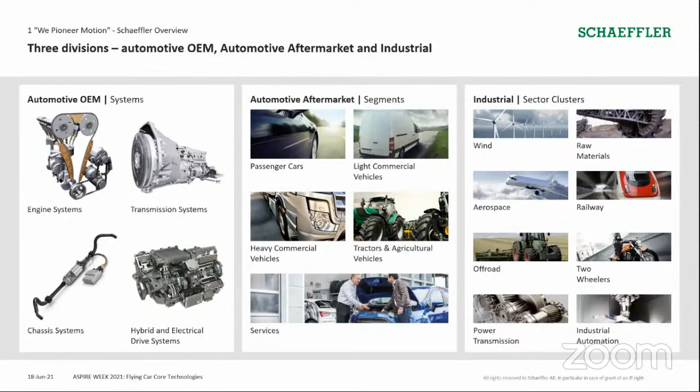What I want to highlight here is really that we have a lot of experience that I'm very proud to say is cross-pollination, where something that has developed many years in, say, automotive can then be moved into wind or off-roads or raw materials and aerospace and vice versa. What we do in aerospace can then be engineered and become a cutting-edge technology in railway or automotive, etc. So this is the strength of what we have as a conglomerate of industrial and automotive company here at Schaeffler.

Okay, a bit more then, because today we're talking about aerospace and I'm from aerospace. I'll talk a bit more about our footprint in aerospace.

Firstly, we are a manufacturer of bearings. The most common bearings that we talk about would be like ball bearings, but there are a lot more bearings than ball bearings. I'll not go into the detail here, but I just want to say that on all these bearings, as you can imagine, anything that needs to turn, needs to rotate, will actually require some form of bearing to reduce friction, to ensure the turning is smooth, etc.

So actually, in all the planes that you take, and the engines that power them in commercial aviation, the technical term is turbofans. And across all, I think, major commercial aviation turbofans, we have some bearings on it that is made by Schaeffler.

Some of it are like all this here they see on the screen here are what I'll call the growth sectors. We are very successful on all the legacy programs, the mature programs like CFM56, PW4000, the Trent programs that if you're familiar with, you know. But these are really what I would say are the planes that have been manufactured in the last, say, 5 to 10 years, and they have another 40 years to go, and we have bearings on them as well.

Okay, so this is something that we are very proud of, and we look forward to continue to really be on these new generation engines because they are clearly more efficient. They do a lot more in terms of greening the environment, and we are very proud to be a part of them.

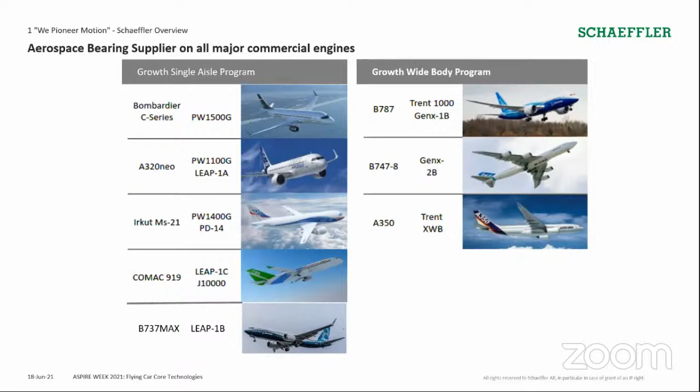And of course, I cover the Asia Pacific region. We also look out for opportunities like OEM opportunities where people want to build new things and require bearings, be it in the UAM space or in the traditional commercial aviation space.

Okay, and now I think it's really the gist of what I hope to share with you after the introduction. Firstly, this is what I call the inevitability of cars growing wings. Cars have been on the road for a long time, so has planes been flying in the sky. But flying cars has always been a dream, and I think we, this generation, yourself, myself, are really at the cusp of seeing it happen. And I hope to provide you some evidence and food for thought to see why this convergence is so real today.

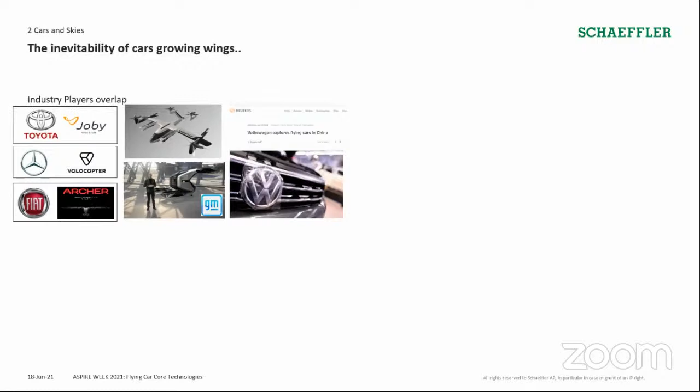And this picture from Reuters, a snapshot from their website news, shows that Volkswagen, as recent as one month ago, talked about wanting to explore flying cars in China. So clearly there's an industrial player overlap where the traditional automotive players are moving into this exciting new space. They want their cars to fly, if you put it colloquially.

Then the other thing I want to highlight is what I call a core technology overlap, where a lot of these core technologies, even if they want their cars to stay on the ground, they need to explore. And these technologies are also, coincidentally or by design, the same set of technologies needed to enable UAM and flying cars. Firstly, electrified propulsion. For anything these days, partly because of the green movement for sure, but also because of factors like noise, you want to fly near airport considerations where you want to land, you need electrified propulsion that's cleaner and quieter. This has been in development in automotive for a long time, and today all the major UAM players are also talking about electrified propulsion. So that's the first technology overlap.

The other one is energy storage. You probably will have heard about lithium, or even solid state batteries, and of course today we keep talking about hydrogen as well. This is also an area of energy storage where, say if you buy a Tesla, or your father or your friend buys a Tesla, the question is, what's the range? In electric vehicles, the number one question is, what's your range? It's like your PSLE score. What's your range? So the range matters, and rightly so, because nobody wants to spend time constantly charging their vehicle or having range anxiety. So energy storage has become a big domain for the automotive player to play in.

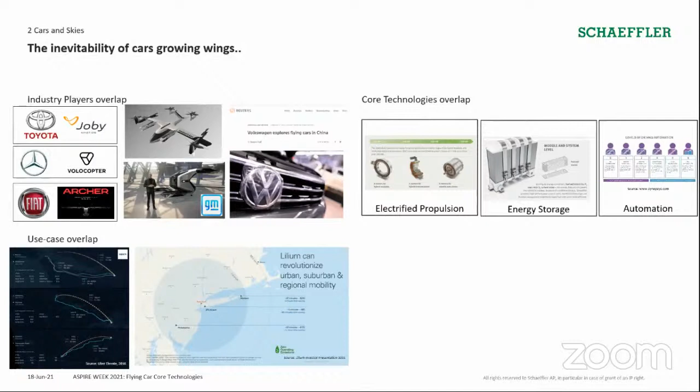And of course, if you are the automotive players of today, instead of being displaced by similar use case UAMs, you then want to join them, right? So that is the inevitability of car growing wings.

The final point would be a bit more philosophical, if I may. It's really that there's this socialization overlap. In this socialization, companies are trying to talk to us about their messaging, about who they are as a company. You'll be familiar with this at scale - if I ask you what Apple is about, all of you have a ton of feelings about these brands, right? I think it is not that different in terms of how even a company like Joby or industries like UAM as well as car industries have come to that form of marketing concept.

There's a socialization overlap, and today the socialization is largely about speaking to a generation like yourself about what the company stands for, not just in technology, not just in the service they render, but what they stand for the planet, in a very broad sense.

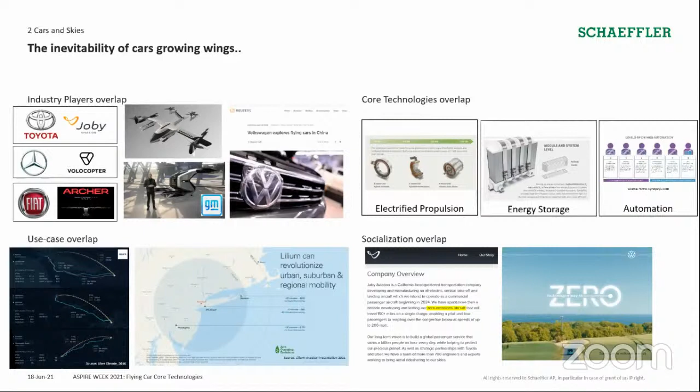So this is really about this socialization overlap, that the car manufacturers, as well as UAM, are not just telling you that I'm going to save you time or let you have a good time, but that if you buy our product or use our services, you become part of this global movement of creating a better world. So there's a socialization overlap that car manufacturers are already on, and UAM is pitching a similar idea. This convergence brings us to the inevitability of cars growing wings, that these two industries have come so close together that they are almost one.

Okay, that's just a flavor about cars and skies. Hopefully that has given you a broad overview about how these industries are coming together. The other thing I'd like to talk about in greater detail is the core technologies we see as important to enable cars flying in the sky.

The first enabler would be electric motors. To enable flying cars, you would need better electric motors - lighter, quieter, more maintainable, and more importantly, certifiable. I'll elaborate a bit more about this concept of certifiability, being able to certify it.

Schaeffler has made many strategic acquisitions because we believe in this electrification movement of the world. We bought a company called Compact Dynamics - they do electric motor design. We bought a company called Elmotec Statomat - they do high volume production of e-motor machinery. This allows us, with our unique appreciation of manufacturing and engineering ability, to mass produce high quality electric motors, which is the picture you see here in the middle.

Our involvement in Formula E, top left corner, shows we actually have a Formula E race team, which is electric. Formula E is the electric version of Formula One. Because of our involvement in this race, it has allowed us to constantly push the limits of e-motor designs, like power to weight ratio, efficiency, things like that, that we have constantly been on.

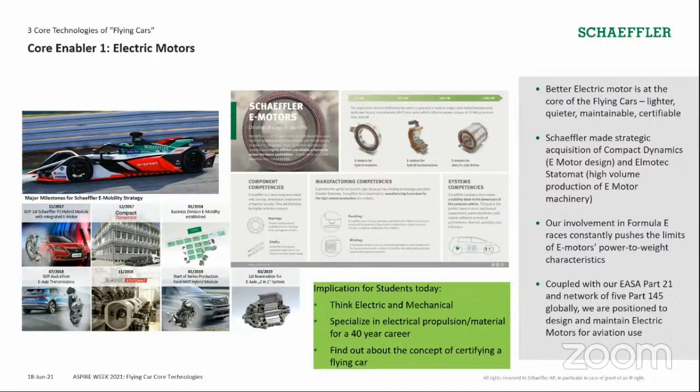But I think this will be interesting for a student to think about, because if you do join this industry, I think this will be a large part of your work - more than pure technological breakthrough, it will be largely about how to harmonize this technological breakthrough back to a certifiable framework in the existing commercial aviation industry. Okay, so this is the first point on electric motor.

Second, a technological enabler that we believe is important in making flying cars truly able to fly is cloud-enabled condition monitoring. There are actually many layers of points here. I'll go through them one by one.

Firstly, in the eVTOL or UAM operation, by design it is short duration, right? If not, you can drive. If it's very large, very far away, you also don't want to take an eVTOL - you'd take something like a train or whatever. It's over a large area. That's the whole use case - fly over something quickly with rapid turnaround.

I think if you read the investment thesis of Lilium, they'll tell you each vehicle, each day, is supposed to generate $15,000, if I'm not mistaken - you can read up on this. So the point is, to make it work, it needs rapid turnaround. You need it to be constantly like a super grab, as you can imagine. The driver has no time to wait - just stop, then go to the next destination, pick up the same passenger, and keep going and going. There's no stoppage time, so you need a rapid turnaround.

To enable this, you need some form of condition monitoring, because you cannot allow downtime. You need an incredibly high uptime for this eVTOL commercial model to work.

Because of the large area, some of the parameters needed in this condition monitoring system are as follows. It has to be cloud-enabled, so that anywhere, anytime, it can be accessed by a set group of people. You need it to be manufacturer agnostic, because there are so many different brands of people building different things today - there's no standard on what kind of condition monitoring tools framework to use. So yes, the solution needs to be manufacturer agnostic.

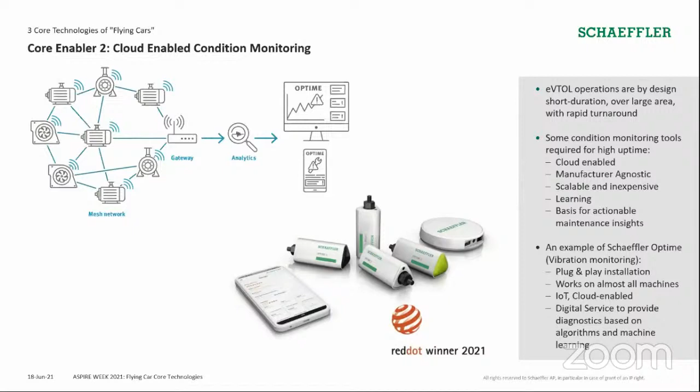But more importantly, it is learning. It takes a vibration pattern, and then we use AI and machine learning to understand what's going on, and provide as a service meaningful insights on what is happening to your machine and what that means in terms of maintenance action. I think for students here, I've talked about this technology, cloud enabled and condition monitoring.

The goal is really that for students today, you need to understand that the world has moved to a point where data is king. It's a cliche to say today, but yes, data is king. You need to collect data, lots of data will be collected.

And to manipulate that data, you as a student today need to be reasonably familiar, at least from a conversational perspective, with the idea of coding. You might not be the one coding, you might be project managing people who code, might not be working in Singapore, but you need to be able to talk their lingo at least.

So I think what's important is that you need to be familiarized with languages like Python or R, or whatever else your school is teaching you. Take those lessons seriously, and truly code. Don't ask somebody else to do it for you. Do it yourself and really get a good grasp of it, because it is important.

And you need to understand big data concepts, different ways of manipulating data, different tools like Hadoop, whatever is out there. You need to somewhat get a grasp of it. You need not be an expert, but you need a working knowledge if you want to go into this field, or if you want to project manage a bigger thing, you need to minimally be at a conversational level able to talk about these things.

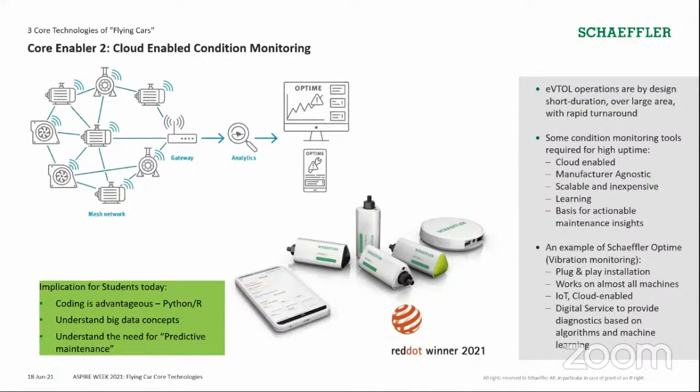And I hope I've given you some implications of what you can do as a student today. The third technological enabler that we foresee is that we need some form of a steer-by-wire concept, some form of actuation system. Electrified AAM or UAM vehicles require some steer-by-wire solutions to actuate control surfaces.

Because if you look at the latest design, even from our friends at Volocopter, they talk about a tilt rotor concept where you vertically take off, but you need to turn the rotor so that you can fly forward, or they have some wings or control surfaces that you need to actuate. So we're talking about something that needs to move in flight, so you need something to actuate it. At the moment, there's no mass market ready product in this class in terms of steer-by-wire or control-by-wire for aerospace.

So what we have here is a paravan. I'm not selling this thing to you, but I just want to let you know that this is what Schaeffler has been doing, and it shapes our thinking quite powerfully as well. We have this Schaeffler Paravan Space Drive. It has more than 1 billion driven kilometers. It was designed for disabled people to drive the car.

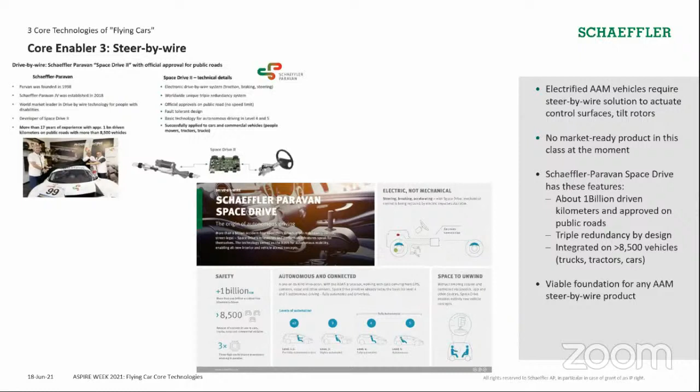So it's a joystick system that you see in the middle of the screen. It has more than 1 billion driven kilometers. It has triple redundancy by design. It is integrated into more than 8,500 vehicles globally. It's a viable foundation for any steer-by-wire concept that we believe is needed in the AAM or UAM industry.

I think what I would share in terms of what it means for you is that, as a student, you need to see that while I've convinced you the world is going electrified, I also want you to see that while it's electrified, we live in a brick and mortar world. You live in a house that's built physically, right?

Because of this reality that we cannot avoid, no matter what happens, we need something mechanical to deal with the physical environment as well. Anyway, let me go back to my first point first.

Electrification, or what I want to type there is electrified actuation, is actually an enabler of autonomous driving. Because like I alluded to autonomous driving just now, it's generally accepted that for anything to be autonomous, you want a computer to guide it, you need an electrical system so that the computer can control an electric motor. A computer can't control an ICE, a combustion engine, as well as an electric motor in general.

It's not that it's impossible, but it's a lot more work. Because if it's electric, you just control the voltage and it goes. But if it's ICE, you have to control a lot more things, how the fuel goes in, blah blah blah.

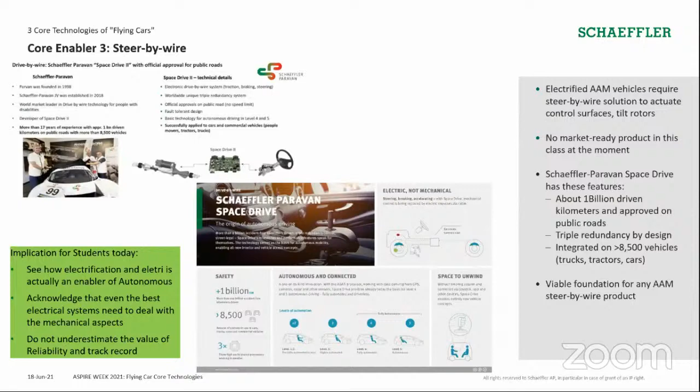Of course, you want the government to have a robust framework around it. So how do they do that? They have to base it on the value of reliability and track record of the product, and all the designs in place to ensure redundancy, etc. So I think this is important, and these are the 3 points I hope to leave with you, thinking about this.

And then finally, the second last point is that we talk about energy storage, and specifically I want to talk about hydrogen, because I think we are part of a growing eVTOL, or UAM industry that is really not a standalone economy.

It is part of this green economy, and hydrogen in its various forms will likely be adopted as one of the key energy storage solutions, either in fuel cell form or pure hydrogen form. If you're interested, you can read up more on the hydrogen topic. But coming back to our application, if you want longer range, higher payload, and to carry heavy things, you need to go beyond today's batteries. There will be a limit in terms of the energy density that today's battery has, even theoretically.

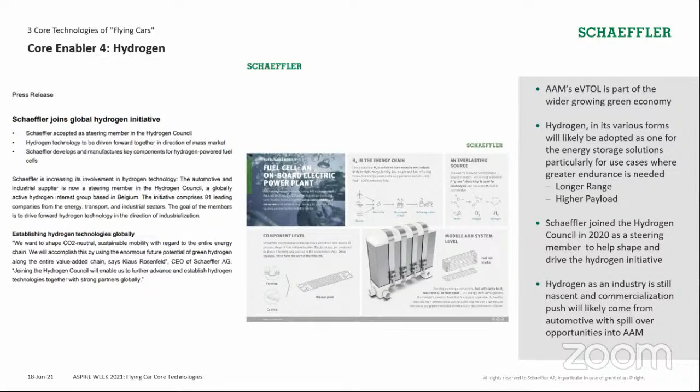So we need to move towards something like hydrogen. We don't know the answer, but Schaeffler joined the Hydrogen Council in 2020, a global council to drive hydrogen initiatives globally. I don't have a crystal ball, we can't see exactly how it's headed. But hydrogen is an industry that's still growing, nascent and young, and commercialization push will likely come from automotive, with a spillover to UAM, air taxis, etc.

As Schaeffler, we expect that our investment in automotive will be able to be plowed back into our aerospace business. And the implication for you today is, if you're not already familiar, you should know that for a lot of technologies today, the bottleneck is not the electric motor. It is really the energy storage technology.

So the point here is, if you're interested in looking at a career and somebody talks to you about energy storage, don't just think battery sounds boring. It is not boring, it is the bottleneck of many, many things today. You can truly carve a niche, an edge, or even start your own company if you have some patent around solid state batteries, lithium, hydrogen fuel cells, etc.

So this is really what I hope to leave with you, to understand that when you look at Energizer or Duracell batteries, you think why would we want to do anything with it, it doesn't even move. It is not boring, it is actually very, very cool and exciting. So this is one thought I leave with you on energy storage and hydrogen.

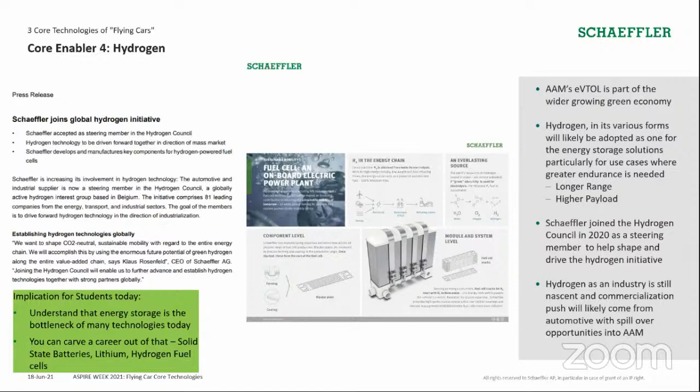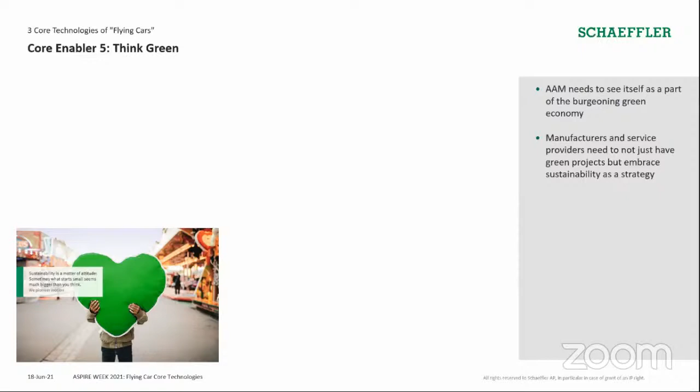Finally, I want to say that AAM, UAM, air taxi is part of the burgeoning green economy. Manufacturers and service providers need to not just have green projects. They cannot just say I plant trees, or I got solar panels installed on my factories. Those are good things and necessary, but they need to embrace sustainability as a strategy. So this is just what I want to share as a flavor.

Like even Tesla recently, though more recently he has gone back and forth on it, Tesla talked about no longer accepting Bitcoin over climate concerns. So just a thought: you would think that if you're a manufacturer, you just need to manufacture something that is good, like an electric car, good for the environment.

And the next step you think you've gone beyond is that you need to manufacture it in a green way, cutting edge, without creating a lot of pollution in the manufacturing process. You think that's good enough? Usually that's good enough, but today even peripheral things about how you collect your money, whether Bitcoin or cash, matters as well. So the point is, holistic appreciation of who the company stands as, what the company is about in this green economy, matters holistically.

That's why Schaeffler also does our part. We were recently nominated as one of the 50 sustainability and climate leaders by the United Nations. It's because we also take this seriously, and we have that to show that people agree we are taking this seriously.

Coming back to you, students today, I think what's important is to consider how what you know, be it your engineering know-how, your technical know-how, your marketing skills, your sales ability, whatever you're learning in school, can be applied in the booming green industry.